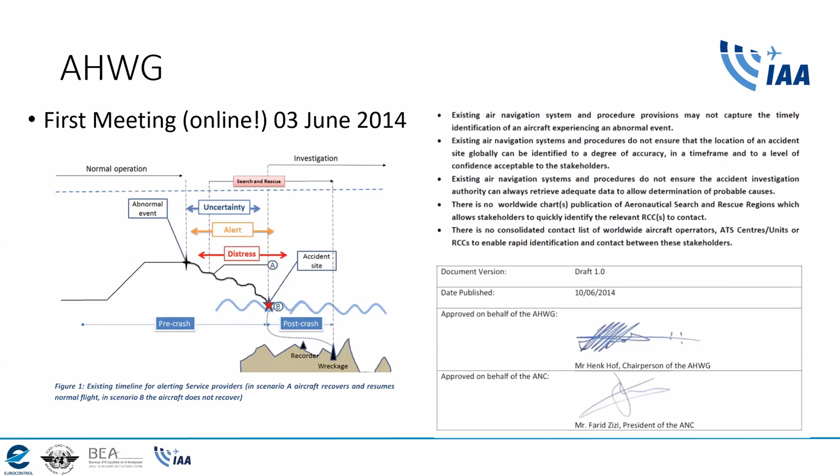Rolling on then to, I think it was June 2017, and about, I would imagine, 50 different draft iterations of the GADSS, we get to what is still the current version, version 6. So what it set out was the specific issues that the GADSS was designed to address.

The late notification of SAR services when aircraft are in distress, missing or inaccurate end-of-flight aircraft position information, and lengthy and costly retrieval of flight data for accident investigation.

So the objectives we set were to ensure timely detection of aircraft in distress, and this would now allow timely initiation of SAR actions, ensure tracking of aircraft in distress and timely and accurate location of end of flight, enable efficient and effective SAR operations, and ensure timely retrieval of flight recorder data.

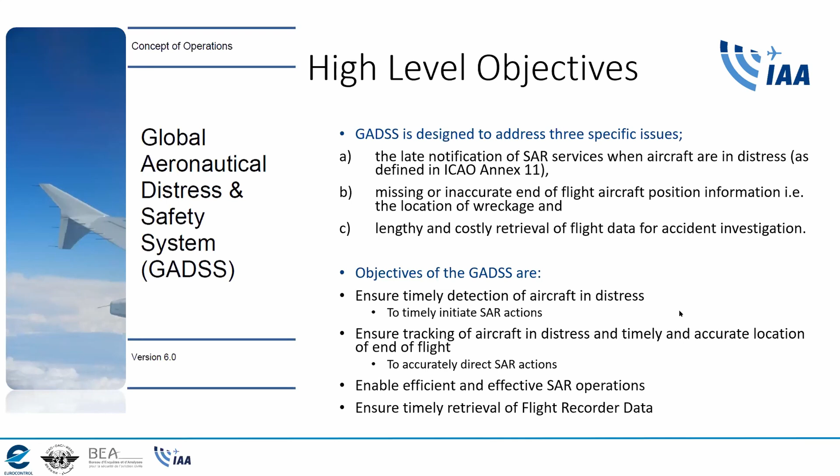So we came up with this graphic at the time. It's very simple, but what you can see is the key components of the GADSS. So at the top, in terms of technologies, we spoke about aircraft tracking, and this basically was to use the existing technologies on aircraft to provide a 4D position every 15 minutes.

Autonomous distress tracking we'll talk about in more detail in a few moments. And then the post-flight localization and recovery technologies as well, and this is to aid primarily in the location of the aircraft and then in accident investigation post the accident.

But what was also very important was the whole issue of the ability to share data. So clearly, there were issues in how we would share data between the airlines, the air traffic services, and rescue coordination centers. So very much a big part of the ConOps is data sharing capabilities with the SAR and accident investigating authorities.

So over the last few years, we've developed these standards and recommended practices for these key parts. Specifically in relation to aircraft tracking, you will find them in section 3.5 of Annex 6, Volume 1. Likewise, location of an aircraft in distress talks to the autonomous distress tracking concept, and that's in 6.18. And then flight recorder data recovery is covered in 6.3.5. You will see a lot more information on these over the presentations over the next 2 days.

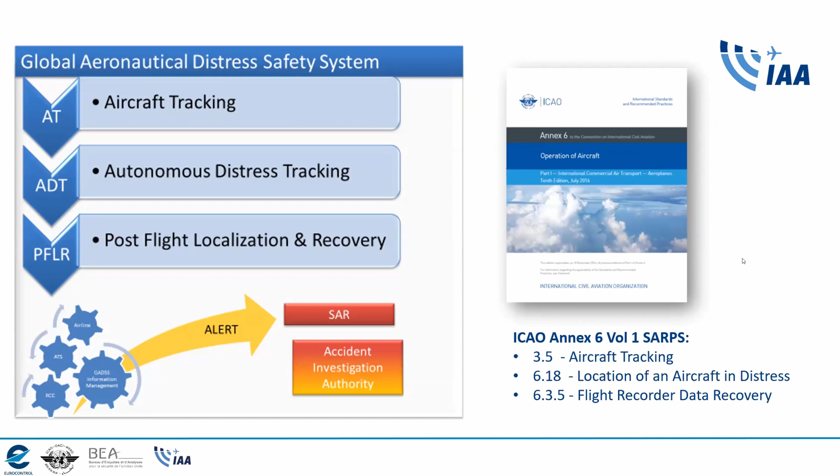Just to highlight again, a big part of this was the ability to share data and how data moves through the system. If you look at the actual GADSS ConOps, you will find some very good detailed graphics on how this happens.

Swim lanes, etc., drawings of how the data will flow through the system. You will see, for example, on the left, how ADT data will move to the ADT service provider onto the MCC through the GADSS information management system, and how it can be shared with the ATSUs, etc., and back through the RCC to the SAR service. But again, you'll hear a lot more about this in detail in the presentations to come.

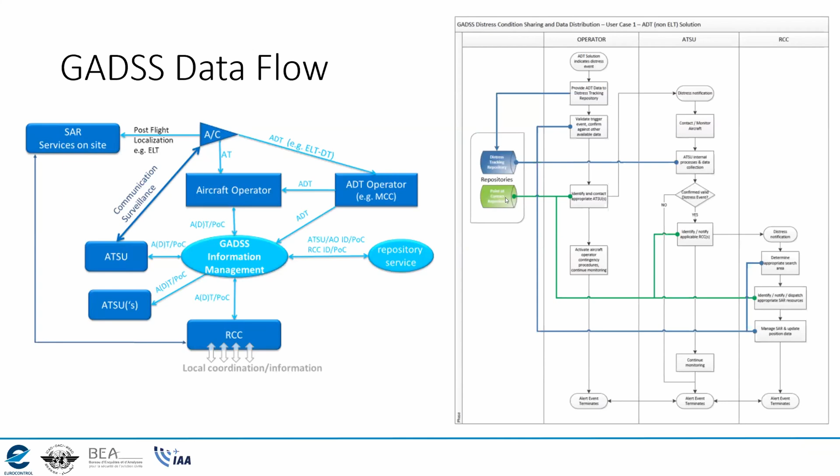Just to go back, two of the important parts to make that data sharing happen were what we referred to at the time as the distress tracking repository and the point of contact repository. These have now been fleshed out and explained in greater detail. ICAO now has what they call the Ops Control Directory, which is basically sharing data about air operators and air navigation service providers, and what they now refer to as LADR, the Location of Aircraft Distress Repository, an aircraft data repository. You will hear about this tomorrow as well from ICAO.

If you need some additional information, ICAO has put together quite a good site on global tracking initiatives, and you will find copies of the various documents in there, including the ConOps and guidance material in ICAO Doc 10054 and in Circular 347 related to aircraft tracking.

So that's a basic introduction to the GADSS ConOps, how it came to be, and what its main constituent parts are. I'm going to keep going now and talk more specifically about autonomous distress tracking and give you some more information on that.

In terms of a definition, this is the one used: the capability, using transmission of information, from which a position of an aircraft in distress can be determined at least once every minute, and which is resilient to failures of the aircraft's electrical power, navigation, and communication systems.

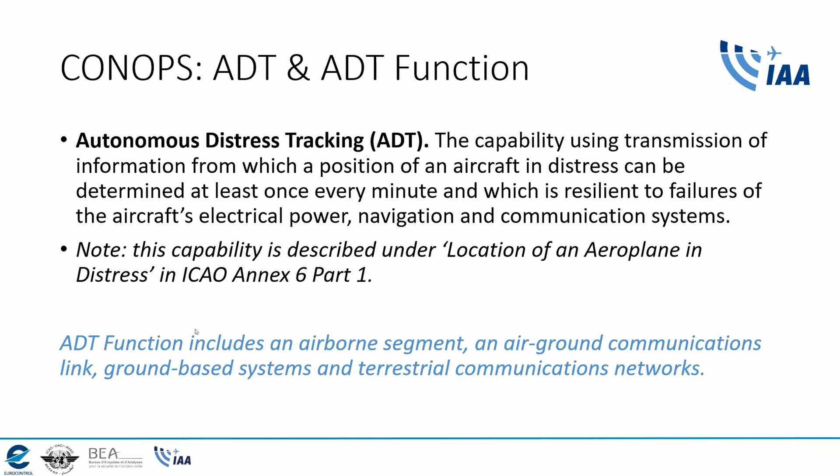An important distinction to make, which evolved after the ConOps last version, is between the aircraft distress tracking capability on the aircraft, and the broader ADT function, which includes an airborne segment, an air-ground communications link, ground-based systems, and terrestrial communication networks. I'll explain that a little more in a later slide.

The actual requirement in ICAO Annex 6, 6.18, defined as location of an airplane in distress, requires aircraft with a mass over 27,000 kilos, which will be issued with an individual certificate of airworthiness after the 1st of January 2023, to have this capability. So basically any new production aircraft coming off the production line should have ADT.

It also has a requirement for operators to make position information of a flight in distress available to appropriate organizations as established by the state of the operator. What this effectively tries to establish is that, to a reasonable extent, the location of an accident site can be determined to within a 6 nautical mile radius. There's additional information in ICAO Annex 6, Appendix 9, and you'll see this here.

A definition of aircraft in distress. This was quite important because we don't want false distress events. The definition that we came to was that an aircraft is in a distress condition when it is in a state that, if the aircraft behavior event is left uncorrected, can result in an accident.

So there are a couple of important notes that go with that definition. Aircraft behavior events can include, but are not limited to, unusual attitudes, unusual speed conditions, collision with terrain, total loss of thrust propulsion on all engines, and ground proximity warnings. Another key point is that a distress alert can be triggered using criteria that may vary as a result of aircraft position and phase of flight.

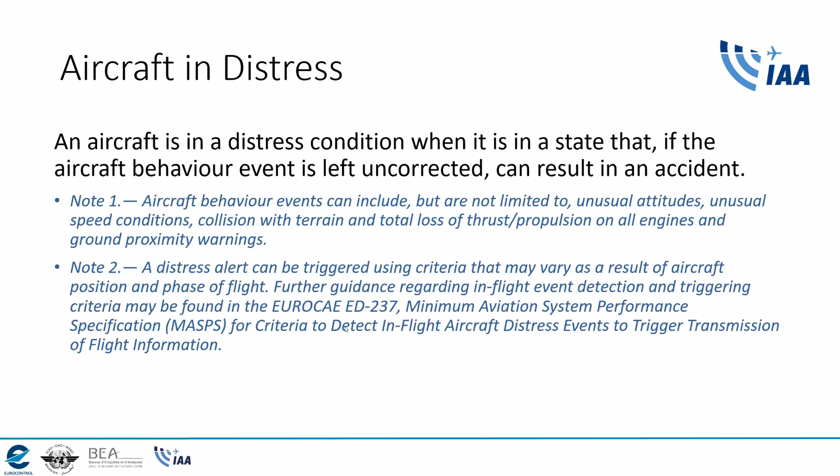Further information and guidance was then provided in EUROCAE ED-237, which is available to buy on a number of sites. So those are the basic ADT requirements that we defined at the time.

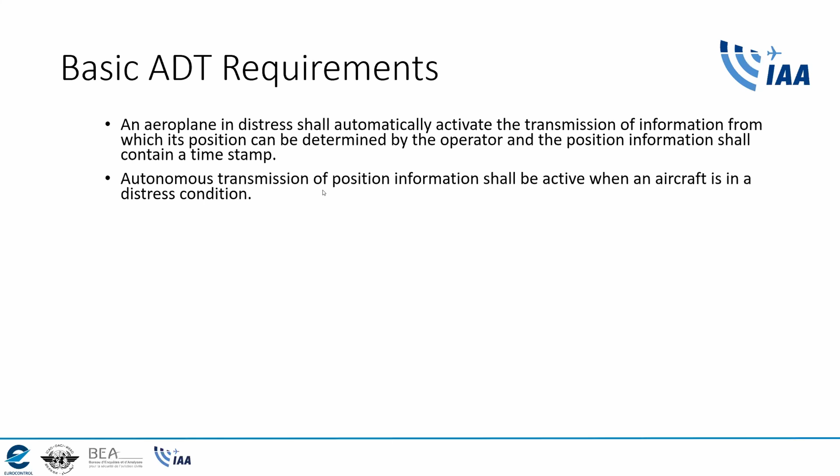So an aircraft in distress shall automatically activate the transmission of information from which its position can be determined by the operator, and the position information shall contain a timestamp. This is a basic requirement of once every minute, defined a little later, and it shall transmit when the aircraft is in distress. This means it can actually transmit before the distress event, but you just need to be able to recognize that a distress event has happened.

In the case of a trigger transmission system, initial transmission of position information shall commence immediately or no later than 5 seconds after detection of the activation event. So if you have a solution that is not transmitting normally, but when the aircraft goes into distress, it must start transmitting within 5 seconds of that event occurring.

These times, the 5 seconds and the 1 minute transmission rate, were determined from research done after Air France 447 as an appropriate time. In the case of the 5 seconds, it related to analysis of aviation accidents in which research found that within 30 seconds, a lot of these accidents had gone from the distress state to the actual accident. So it was felt that 5 seconds was as much as we could allow to ensure we got at least one transmission.

We also put in that it should be possible for this transmission to be activated manually, so if the crew decide they should start transmitting, they can do so. Another important point was that the mechanism that started the transmission should be the only mechanism to deactivate it. So if the aircraft automatically started transmitting, it should not be possible to manually turn it off by persons on the aircraft, as an example.

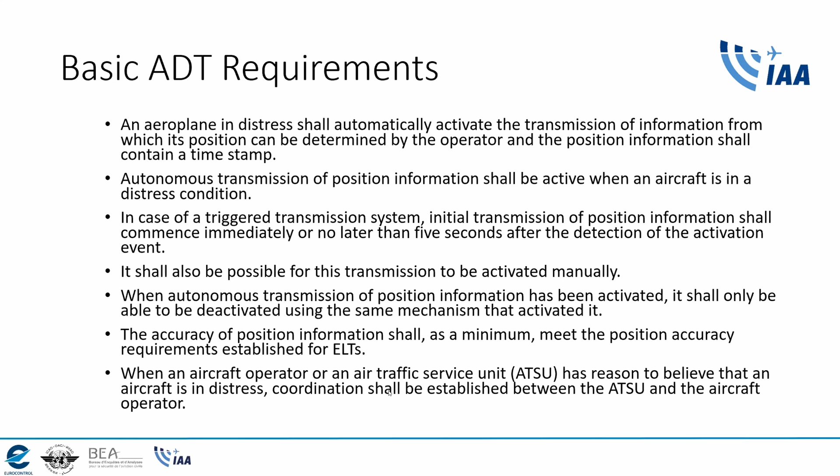It also required that coordination be established between ATSUs and the aircraft operator. There is more detailed guidance on this available, contained in Doc 10054, Manual on Location of Aircraft in Distress. It also covers flight recorder data recovery information, and it goes through the basic ADT systems overview, but also covers how the data is shared between operators, ATSUs, and RCCs.

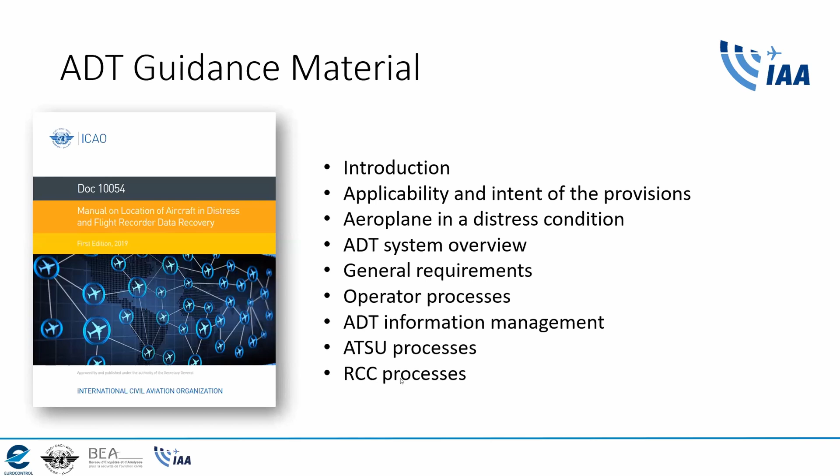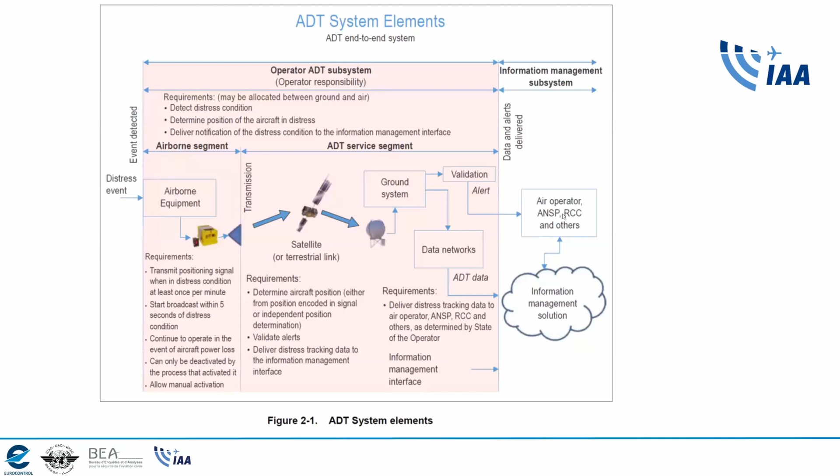Coming back to the notion of an ADT versus an ADT function, this diagram contained in the guidance material in Doc 10054 gives you an overview. There is an airborne segment, which is effectively the equipment on the aircraft. That equipment must communicate, and it does that through an ADT service segment, which is controlled by the operator - that's the overall operator ADT system. The actual output of that system needs to be shared into an information management subsystem so that RCCs and SAR can obtain that information. So that gives a broad overview of the overall ADT system.

There is other guidance material as well; I've mentioned one or two of these. EUROCAE ED-237 provides criteria to detect in-flight aircraft distress events. ARINC 680 ADT describes the technical requirements, architectural options, and recommended interface standards to support ADT. And we also now have EUROCAE ED-62B, which defines the ELT DT. Philippe will give you more information on that too.

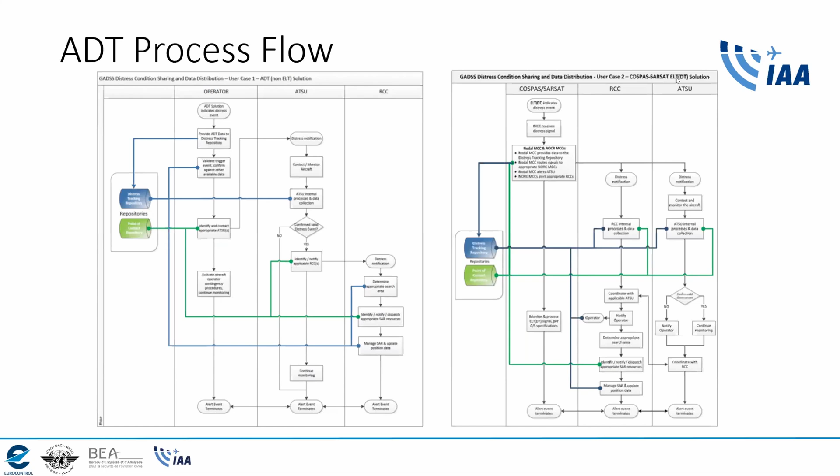There are quite a number of ADT process flows contained in the CONOPS, which show again how the data is shared between operators, ATSUs, and RCCs. It covers a number of options, including the COSPAS-SARSAT ELT DT, which you will see more about, but just in basic terms: if you have an ADT event or potential distress event, and it's an ELT DT solution, that will automatically trigger on the aircraft. That will provide data to COSPAS-SARSAT, generating an alert which goes to the rescue coordination center and is shared to the applicable SAR assets to go to the aircraft.

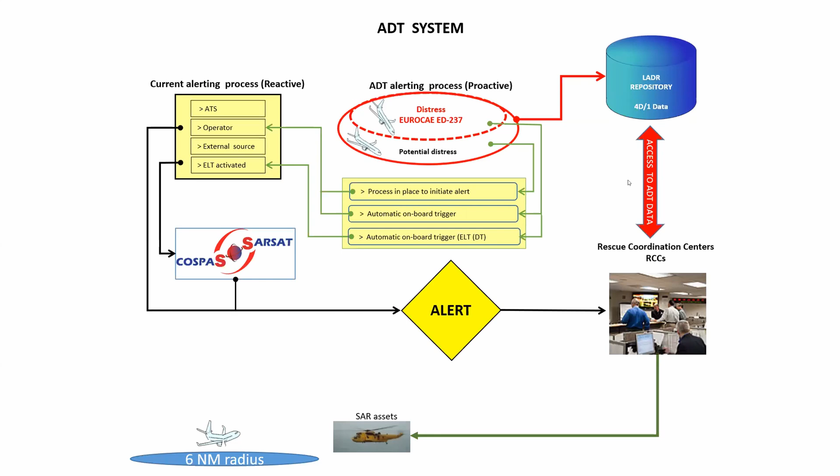Slightly different with other ADT solutions is where the process initiates a trigger which is fed to the operator, and the operator decides whether it needs to notify the ATSU or another coordination center route, and again notify the SAR assets. Just to highlight there is a triggering stream, but also a data sharing stream. So the operator will trigger an alert and advise the RCC, but this will then allow the RCC to access the LADR data to get the actual 4D data that would be available for that event. That's a very basic overview of the ADT system.

You will see examples tomorrow of actual solutions for ADT that are now available in the market. So that's it - that's just a quick overview of ADT and of the GADSS. So back to you. Thanks, Declan.

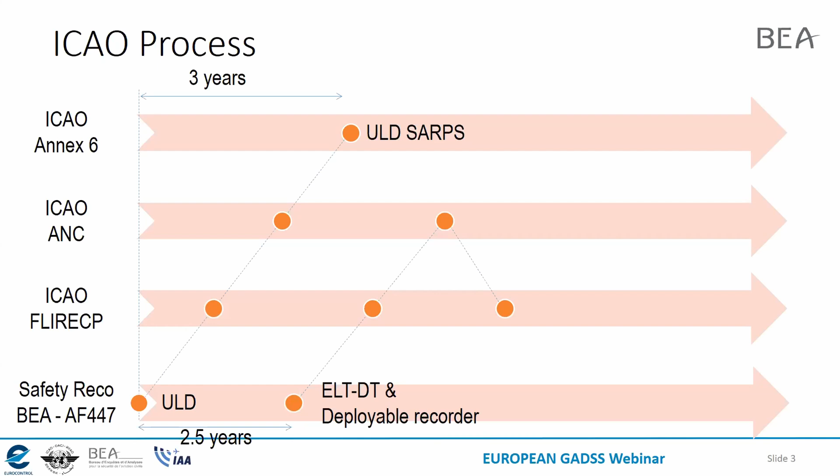But the Air Navigation Commission was not convinced by the work, so they asked the ICAO Flight Recorder Panel to work on it again. We tweaked the wording and proposed the text again, and Air Navigation asked the Flight Recorder Panel again to review the text. Then the MH370 accident occurred, and the ICAO Air Navigation Commission asked the Flight Recorder Panel to make a new proposal, which then went directly into the Annex 6 standard. So now you have in Annex 6 text regarding autonomous distress tracking and flight recorder data recovery.

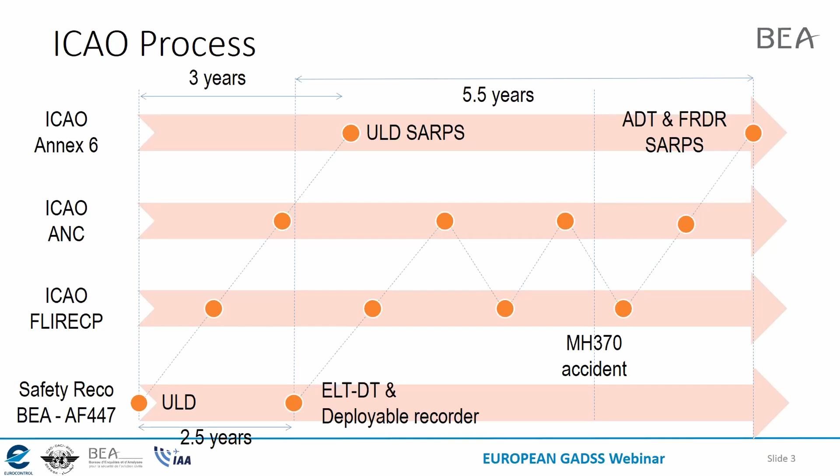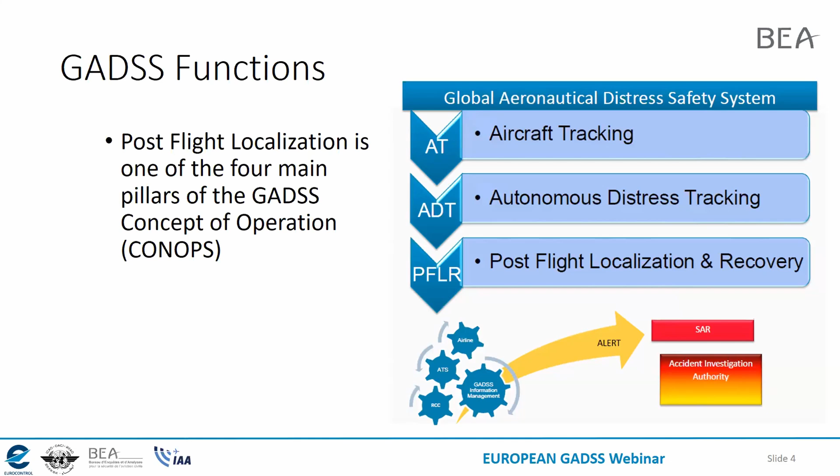So this shows that the process is complex. What we proposed was analyzed by ICAO to ensure it was consistent with what is in Annex 6 and robust enough to be inserted into Annex 6. So now I will speak about the two pillars of the GADSS function: post-flight localization and flight recorder data recovery. I will not present again the diagram that was already presented by Declan.

Regarding post-flight localization, we already had on Annex 6 some standards and recommended practices for emergency locator transmitters. As I said earlier, the ELT is designed to find survivors, and between brackets, it is normal that the ELT be destroyed during a high energy impact.

ELT can survive already 500 Gs, but nevertheless, you don't expect when you have a high energy impact to have a system still active after the impact and able to transmit information to the satellites. The impact or side effect of the autonomous distress tracking standard detailed by Declan on 6/18 was a modification of the standards and recommended practices for ELT. On the bottom of the page there's a new line dedicated to ADT, which says you need at least one ELT and a capability to meet the requirement of 6/18.

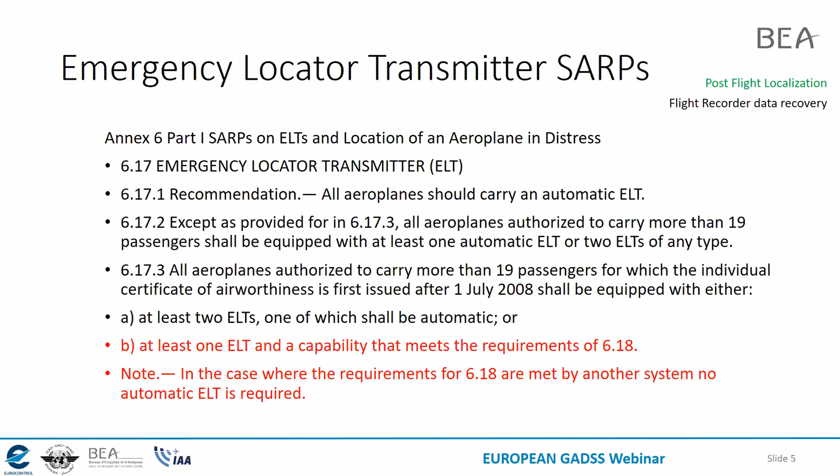As I said, the ELT is dedicated to finding survivors, and the autonomous distress tracking is mainly to provide a position within 6 nautical miles. The 1 minute, 6 nautical mile criteria were detailed on the international working group created in the framework of AF447.

It is good when you are over oceanic areas to have a position at 6 nautical miles, no doubt about that. But if you have only that precision when you are over terrain, it could be a major issue for SAR services. Definitely having 150 square statute land miles over a mountainous area is too much to be able to find survivors quickly.

During the 13th Air Navigation Conference, the 44 European states and Eurocontrol presented a working paper explaining that the new ADT standard will not be of sufficient precision for SAR in mountainous areas. We had a detailed working paper defining the needs for better location of survivors.

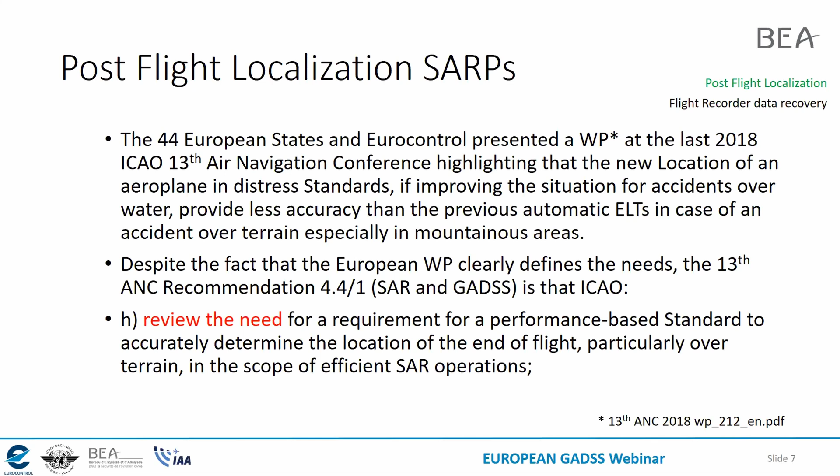Then various working groups were consulted. First of all, there was a GADSS advisory group that was consulted to propose some needs. And as well, the ICAO air accident panel is as well involved to provide feedback on ELT activation, because it is on the report from accident investigations that you may find information regarding how the ELT worked on some accidents.

So all these groups are consulted, it's not yet completed, to establish the needs. So far, from the consultation of this group, what we can say is the expectation is that there is a need to have an accuracy of about 200 meters 2D accuracy as a minimum, with some redundancy regarding GNSS position and 121 homing.

So it means that it is very important to still have people equipped with 121.5 MHz homing signal going on site. And we have seen many times in general aviation that it is the best way to reach very quickly the crash site.

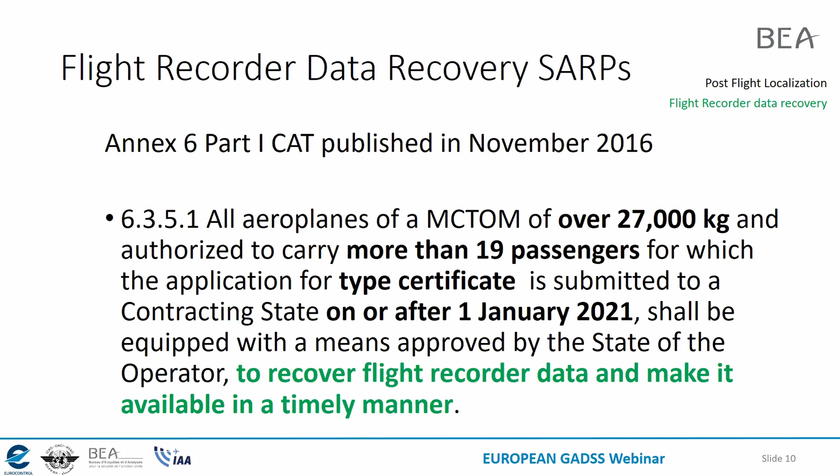So as soon as you have a performance-based standard, you will need some manual. And the manual already detailed by Declan, the Doc 10054, will cover flight recorder data recovery as well.

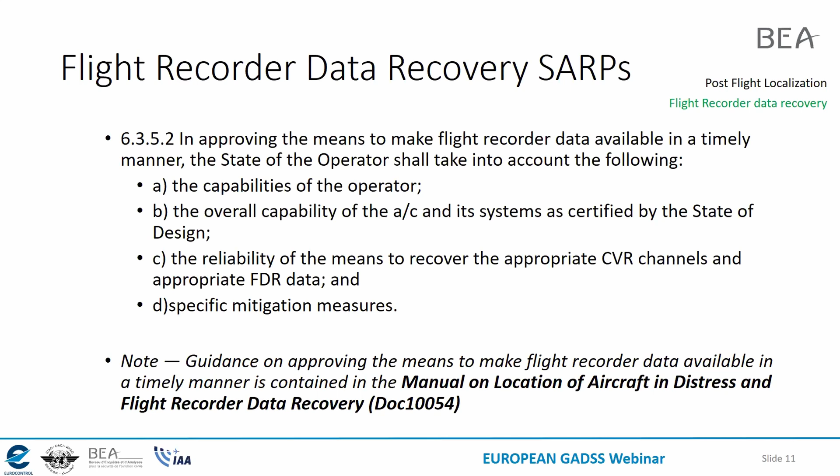And on the second SARPs we have on Annex 6, this document will explain the capabilities of the operator. So all the text is explained in the manual. On the manual, you will find all the SARPs and all the details to better understand them. So a very important document that you have to check if you're interested.

So the ICAO Manual contains, in fact, two sections: one dedicated to ADT, and a second one dedicated to flight recorder data recovery. We made sure on this document that everything will be explained, what does timely mean, for example, or what is the description of the operator capability. And as well for the flight recorder data recovery, we are giving examples of technology, but using words that allow, in the future, new technology that may arise in 5-10 years' time.

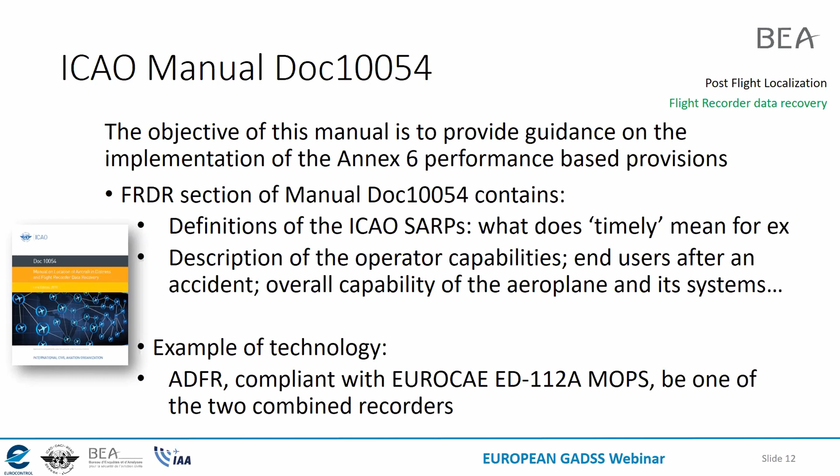So one of the technologies to recover data is the automatic deployable flight recorder. We already have some standard detail from EUROCAE, ED-112A, that explains how it works, what are the minimum survivability numbers, etc.

But there is also other technology, like continuous or triggered transmission of flight recorder data. We imagine that in real time you will trigger or send audio information, parameters, data link, etc. Or you can use triggering criteria that have been used to detect or trigger the distress situation. So we are trying to be fairly open to make sure that you may get data very quickly on the ground after the impact.

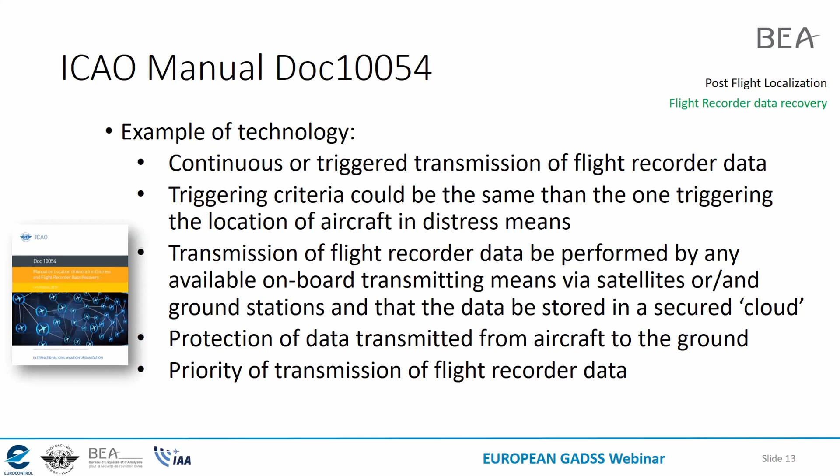And we are trying to provide as well in the manual the kind of protection of the data transmitted from the aircraft to the ground, or the priority of transmission, when you have to transmit audio, parameters, data link, images. So all these things work together.

So just to summarize the means of compliance for flight recorder data recovery: there is already an ICAO standard, some SARPs dedicated to the installation of fixed combined recorders. It is mandatory, as you can see on future built aircraft, to have one fixed recorder on the front of the aircraft and one fixed combined recorder on the back. Both of these recorders record audio, parameters, data link, flight control, flight crew machine interface recording, and images. This will apply to new types of aircraft after 2016.

Nevertheless, we can see that on existing designs, both Airbus and Boeing have decided to install combined recorders on both the front and the back. And very quickly, in 2022, new built aircraft will, in addition, have a 25-hour CVR. So we will have a good combination of recorders on board.

Then, to comply with the flight recorder data recovery standard, you may have on the back an ADFR that will replace the fixed combined recorder which is on the back. So in such a case, you will have two combined recorders: a fixed one on the front and a deployable one in the back. And you may select another solution, which is the streaming of flight recorder data, again continuous or triggered when in distress.

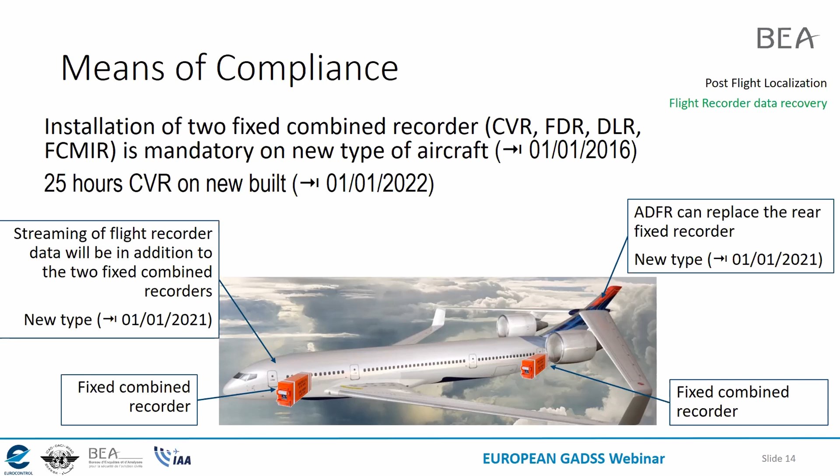So in conclusion, I will come back to the ELT requirements, because I think that the working paper submitted at the 13th Air Navigation Conference clearly defines the needs. It was proposed by 44 states, which is a little less than a fourth of the ICAO states represented at ICAO.

Definitely we need a performance-based standard, or modification of the existing standard. We need to make sure that in the future we will have a standard that provides better accuracy if you have survivors. And we don't have to wait for a new accident to make sure we have this standard. So we definitely need the cooperation of the SAR community and the accident investigation community to make sure we will have robust ELTs, working when needed, to find and locate survivors.

So this is the end of my presentation.

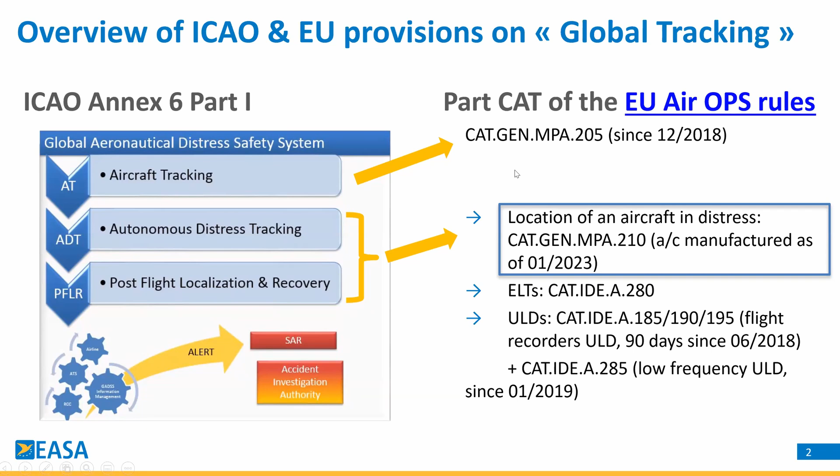The next important thing to be aware of is that the implementation of the autonomous distress tracking concept, as presented by Declan, into the EU operation rule is not a one-for-one match. There are some differences, for good historical reasons. As you can see on the right-hand side, CAT.GEN.MPA.210 requires robust, automatic, and accurate means to determine, following an accident where the airplane is severely damaged, the location of the point of end of flight.

So at first glance, it looks very different from the left-hand side. However, as also mentioned by Declan, Appendix 9 to ICAO Annex 6 Part 1 states the aim of the SARPs on location of an airplane in distress, which is to establish the location of an accident site, providing an accuracy objective of 6 nautical miles. In fact, this aim was made a requirement under CAT.GEN.MPA.210, so we have a more conceptual, performance-based requirement than the ICAO approach.

Besides that, there are some differences regarding the applicability set. Also, one thing Philippe insisted on a lot is the possibility in ICAO Annex 6 Part 1 to replace an automatic ELT with an ADT system, as permitted by section 6.17 of ICAO Annex 6 Part 1.

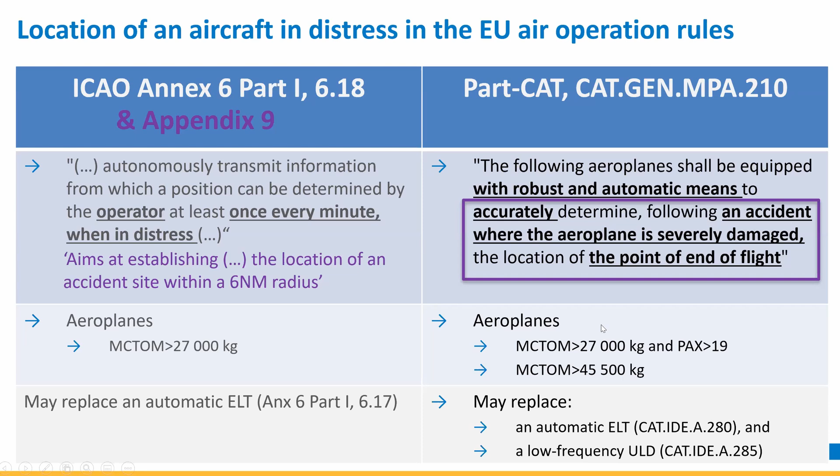Now I will focus on a Notice of Proposed Amendment—an official proposal by EASA of a change not to rules, but to means of compliance or certification specifications. It's part of an EASA rulemaking task with the code RMT.0400, which you can find on the EASA website. The scope of this task is to adopt means of compliance and guidance for the rule.

CAT.GEN.MPA.210, the rule, is already published—actually published five years ago. But at that time it was very early stage, even at ICAO, in terms of developing guidance. So our rulemaking activity was put on hold to see more of the concept ICAO was developing, and we are now still in the process of adopting means of compliance. Clearly, this rulemaking activity will not amend the rule itself—it's not in the mandate—so the differences mentioned before will not be corrected by this proposal.

The approach we took for this rulemaking activity was a performance-based approach. From the start, this was a policy given by the European Commission, because at the time the rule was adopted, the technologies were just identified but not really developed, not ready to be implemented. So the requirement only includes a concept and a definition of an applicability set, and the rest needs to be defined, particularly the performance objective.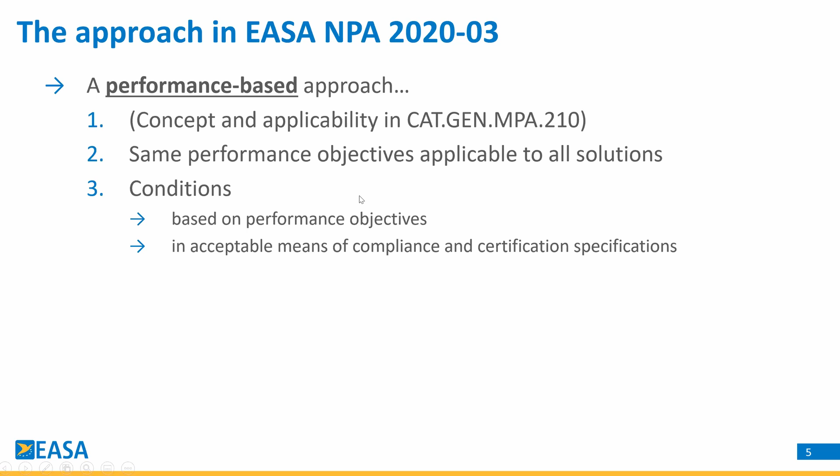By doing so, what was very important for us was to not lose sight of the SAR needs and the investigation needs. In particular, as you have seen before, there has been a lot of discussion about the accuracy that is needed to meet the SAR needs. This was in the presentation of Philippe before.

For us, the baseline is not the historical performance of ELTs. It's the performance obtained with the latest standard, EUROCAE ED-62B as mentioned by Declan before, issued in 2018, and the latest performance achievable by the International Cospas-Sarsat program, including the MEO-SAR component. Addressing the needs of SAR is first and foremost, of course, do not harm, do not have a negative impact in terms of their workload and on their efficiency.

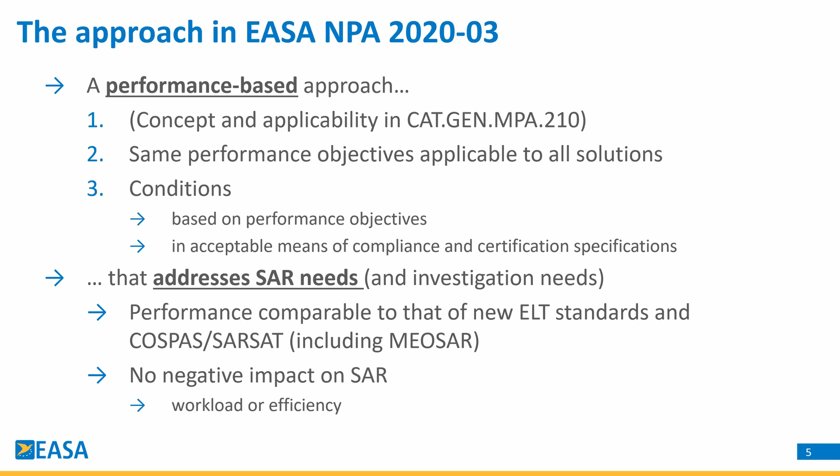This is in a nutshell the process we followed. It was a top-down approach, from the definition of a common performance-based objective to technical conditions, and then transposing them into a regulatory text. Of course, this was an iterative process. We also had some consultations through workshops and written consultation.

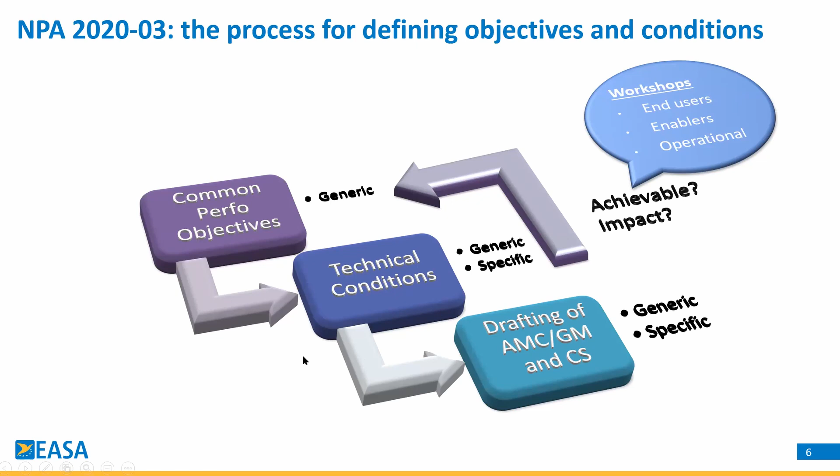The technologies that could meet the ADT concept are the ones below, as you can see here. The emergency locator transmitter for distress tracking, or ELT-DT, was explained by Declan. Another concept very similar is that of high rate tracking.

It also appears in the NPA 2020-03 that was published. It's a similar concept with the difference that the transmitter is not an ELT, and therefore the transmission is not using the infrastructure of the International Cospas-Sarsat program, but other means such as commercial constellations.

In addition, because our requirement just requires locating the point of end of flight, we will accept as a means of compliance systems such as those based on an automatic deployable flight recorder, as was explained by Philippe before. This is a recorder which is automatically deployed upon detection of deformation of the airframe during the crash. It is equipped with an integrated ELT that automatically starts transmitting. So for the purpose of the EU requirement, an automatic deployable flight recorder could also meet the intent.

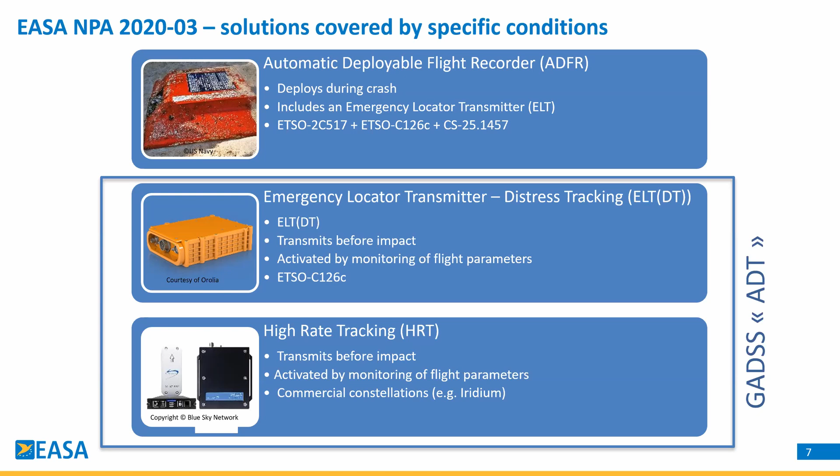I would like to spend the rest of this presentation emphasizing some performance objectives that we have identified in the framework of this rulemaking activity, and that we believe are not yet really addressed in the ICAO SARPs, but are quite important for a successful implementation.

First, there will be three aspects related to robustness, and the very first one is the robustness of the airborne system. It's quite trivial, but we want the performance of the airborne system to not be affected by environmental conditions encountered during most accidents within the scope.

For us, the scope is an accident where the airplane is severely damaged. For the ADT, it's a distress situation. However, a distress situation may also end up exactly the same, in a hull loss. And in a distress situation, if you look at the triggering criteria, it is possible that the equipment is submitted to demanding non-normal environmental test conditions.

So we want to apply, for that type of equipment, environmental test conditions such that it will continue operating under these conditions. Because we allow the transmission after a crash, for this equipment that should operate after a crash impact, crash test conditions would be applicable.

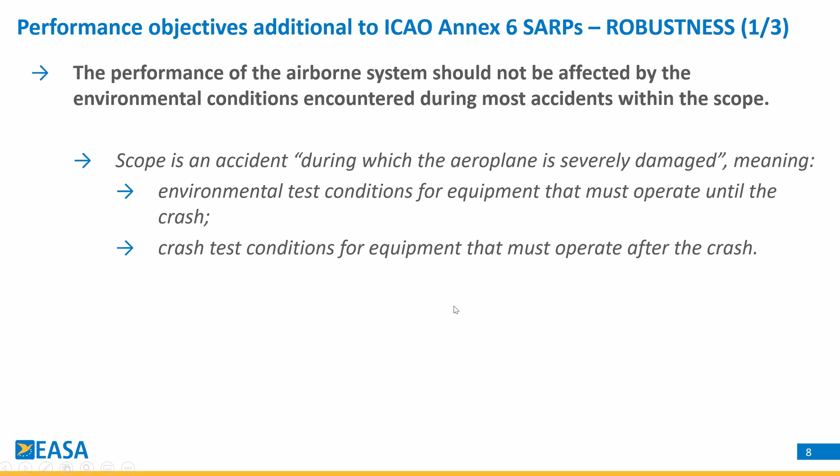The second robustness aspect we would like to have better covered is the robustness of the link from the airborne system to the communication infrastructure. That is to say, to put it more practically, to the satellites, for instance, or to the ground sensors that will detect and process the signals.

This link should be good, not only during normal operation, but under conditions that are encountered in actual accidents, as shown by historical accidents, in particular during loss of control. So when attitude, pitch and roll attitude values of the aircraft, pitch and roll rate values are quite high, when there is maybe overspeed or a high vertical speed. This is under these conditions that the system is expected to perform.

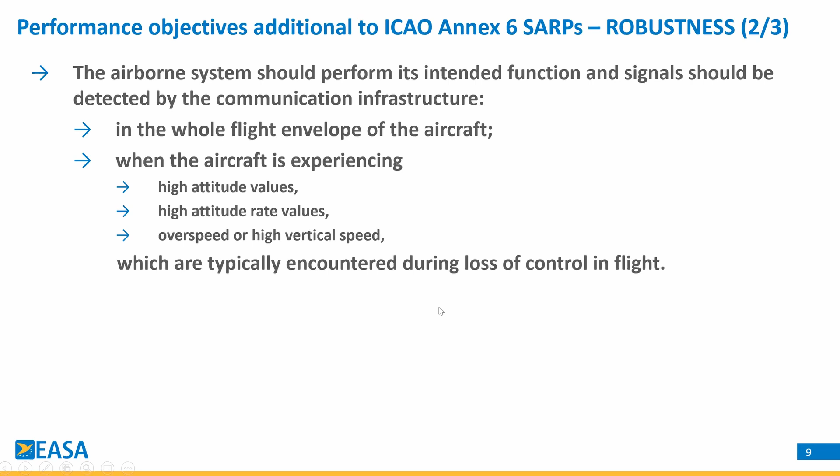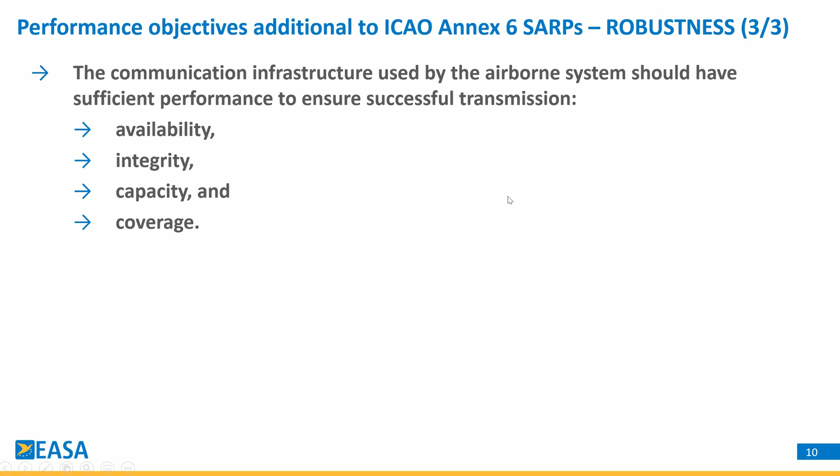And the third aspect related to robustness is the robustness of the communication infrastructure itself. Here we rely on concepts commonly applied to communication systems, criteria such as availability, what percentage of the time the infrastructure is available and ready to operate, integrity, the capability to detect, process and transmit information without undetected errors, capacity, the capability to process signals from multiple aircraft simultaneously, and coverage in time and space. Here we are looking for global coverage most of the time.

My next slide is about accuracy. I've covered robustness. Another performance objective where we will probably be more demanding than the SARPs is accuracy. I think this topic was already quite well explained by Philippe. I'd just like to add that we will make a distinction between survivable and non-survivable accidents.

For non-survivable accidents, an accuracy of 6 nautical miles is acceptable because the stakeholders we want to support are the investigation authorities, and we should bear in mind that the flight recorders carried on board such aeroplanes are equipped with underwater locating devices. So even if it's not maybe the best solution for investigators, it's acceptable to have an accuracy of only 6 nautical miles for performing underwater search operations.

When the rescue of survivors is at stake, a much higher accuracy is required. The homing signal has been pointed to us as essential for operations with mobile SAR facilities. All mobile SAR assets are equipped with homing direction finders, and this is a signal they really need to operate. But we should bear in mind that the accidents that triggered all this rulemaking activity, in particular Air France 447 and MH370, were accidents over oceanic areas where the aircraft sank before SAR teams could be in the vicinity. So there was no homing signal left to guide them, and therefore the transmission of signals with high accuracy is still important to give SAR teams a chance to rescue survivors.

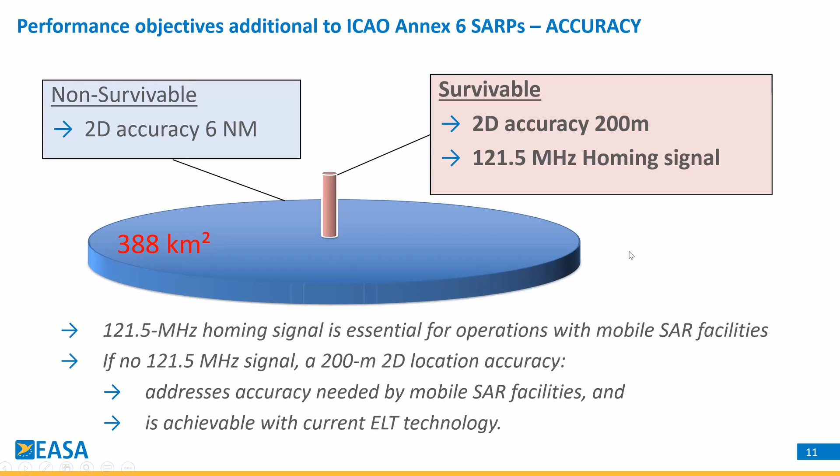The last aspect I'd like to address is the impact on search and rescue authorities. Here we have a first significant difference I'd like to highlight: we have proposed in the NPA, and for the time being we still intend to require, that data stemming from an activated airborne system is automatically transmitted to the competent SAR authority, meaning the search and rescue point of contact designated by the state to receive emergency signals, similar to an ELT. Why? Because this information path has proven very effective, providing a quick and reliable transmission of data.

Also important for us is that there is a time objective. I think this was mentioned also by Declan, but unfortunately in the SARPs there is no time objective, and we want to set a time objective that is compatible with the timeframe for deploying SAR mobile facilities. It's important for RCCs to know where the accident site is located, because depending on where it is, they will have a different strategy and maybe deploy different mobile facilities.

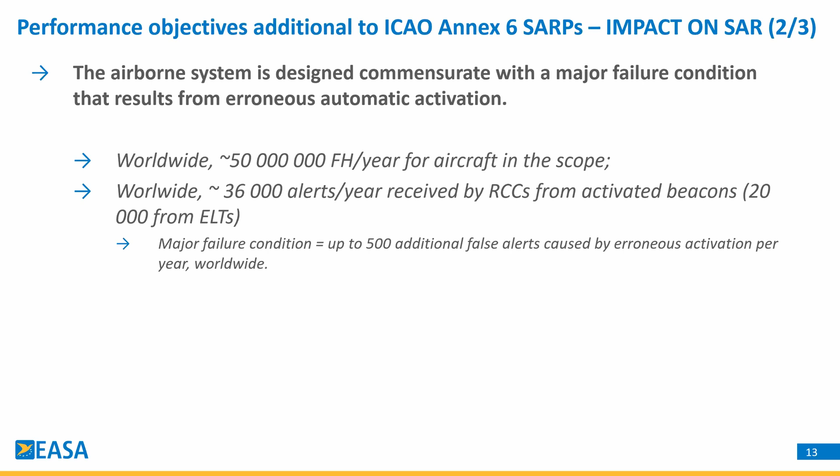Worldwide in 2018, there were 36,000 alerts received by RCCs, of which 20,000 stemmed from ELTs, the rest from EPIRBs and PLBs. So in order to not have a significant increase in erroneous automatic activation, or a significant increase of false alerts, we will set a major failure condition for erroneous automatic activation.

And finally, we propose in the NPA to require that the airborne system automatically transmit deactivation signals when it is deactivated, because this information is also very probably important to be used, and can be in the future. We think it will be more and more used to confirm the situation of an individual aircraft.

And it will help determine whether the transmission of signal stopped because the system was deactivated manually or automatically, or for another reason, such as destruction of the system through a crash impact.

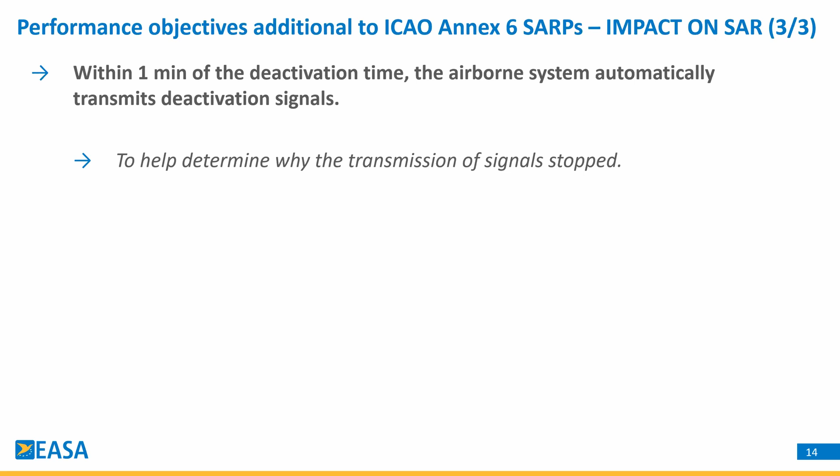And so that was the end of my presentation. So the story is going on. We are now in the time of processing comments on the notice of proposed amendment I mentioned before, NPA 2020-03. Just for your information, there were a lot of comments, and we have reviewed them carefully. We intend to adopt the provisions in the first quarter of 2021. Thank you for listening.